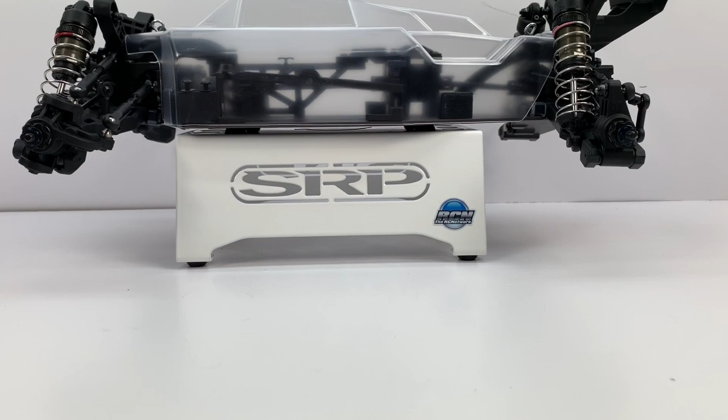This is my full build review of the brand new Tekno EB410.2, Tekno's newest 1/10 scale 4-wheel drive electric competition buggy. In this build review, we'll be going over lots of different topics, including tools needed to assemble your EB, parts left over from the kit, how the owner's manual really is, the actual differences between the 410 and the 410.2. I have mine on hand to compare it side by side, my overall thoughts of this kit, and what the kit's really missing. Also, 2 future videos that will be going over the full reveal, meaning everything fully ready to run on this EB410.2, and finally a running video at OCRC, my local track. As with all of my build reviews, this is everything you get inside the box, fully assembled and ready for electronics, paint, and wheels and tires.

So let's just jump into this.

Some of the tools required to assemble your EB410.2 are a good set of hex wrenches, including a 1.5, 2.0, and 2.5 millimeter hex wrench, a 5.5 and 7.0 nut driver, a good set of needle nose pliers, a good sharp hobby knife, and some Lexan scissors just to trim some parts and cut out the body.

Supplemental tools that definitely help the build are a 3.5 millimeter arm reamer, a body reamer, 2 open-ended turnbuckle wrenches from Tekno, a 5.5, 7, and 4 millimeter is what I use. And finally, Tekno's shock shaft pliers are a great asset to get those shocks built up perfect.

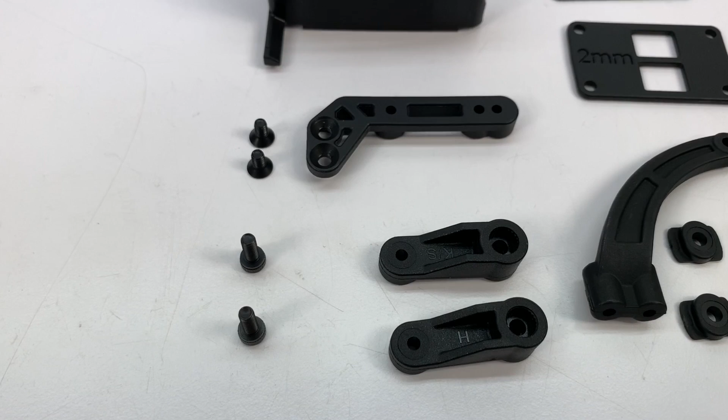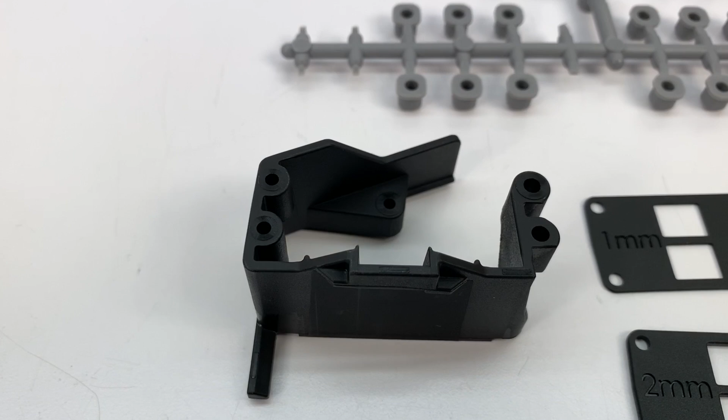Parts left over from the kit are some motor bolts that I'll mount my motor up with. You have 2 different spline servo horns, both 23 and 24 - I mounted up a 25. You have the included motor fan mount and the hardware to mount it. You have a regular sized servo mount, but I installed the low profile servo mount.

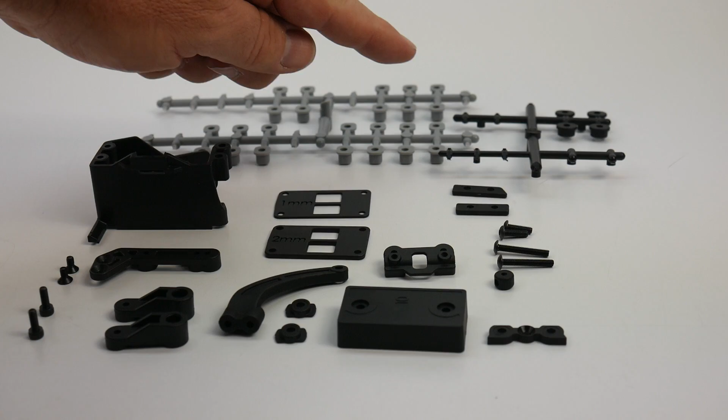All of the pills up here are for the new 3.5 millimeter suspension pins for the car. You have some roll center inserts here for the rear hubs. You have 2 different diff shims, 1 millimeter and 2 millimeter. You have the second rear chassis brace - the stock setting is to mount only the longer one. You also have the inserts to adjust for the diff shims over here.

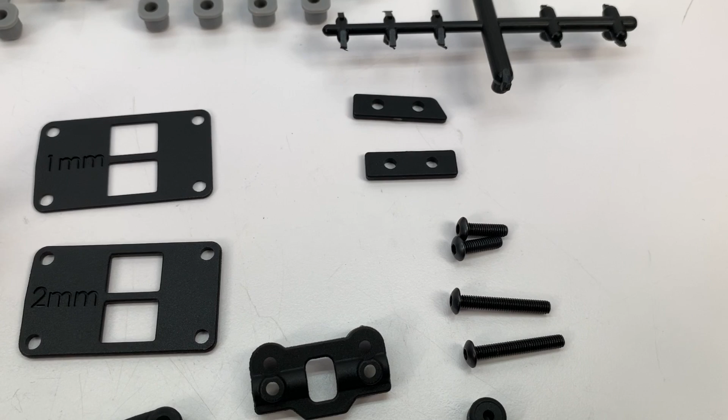You have a 10 millimeter block for the rear wing. You have the rear sway bar mount if you choose to mount it in the traditional setting - more on that a little bit later. Some servo shims right there, some extra hardware, an extra piece for a sway bar, and this thing that I have no clue what it is. It looks like an owl face. Didn't see that anywhere in the owner's manual.

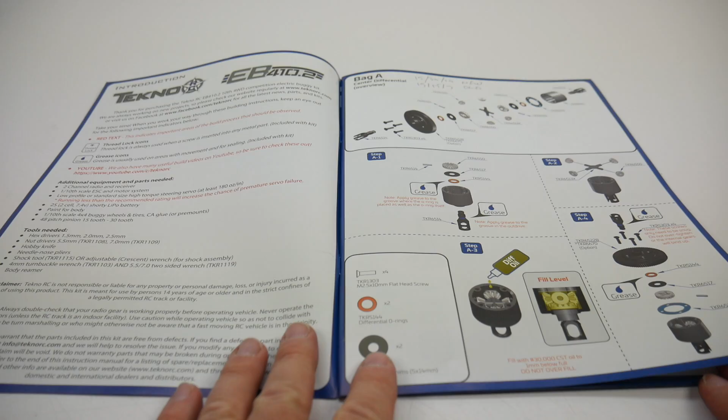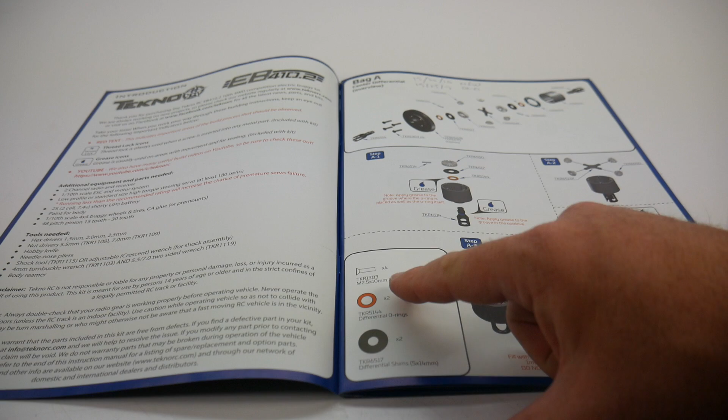Taking a look at the owner's manual for the EB410.2, it's just like all of the other Tekno owner's manuals - it's good, probably the best owner's manual that I've seen in any RC vehicle. They do a lot of great things, not only with the illustrations, but a lot of written content went into this owner's manual, giving you tips and tricks and almost explaining why they're doing things, which is pretty nice. One thing to note, they do give 1-to-1 diagrams here, unlike a certain vehicle I just previously built. They also give you lots of different notes in here on things.

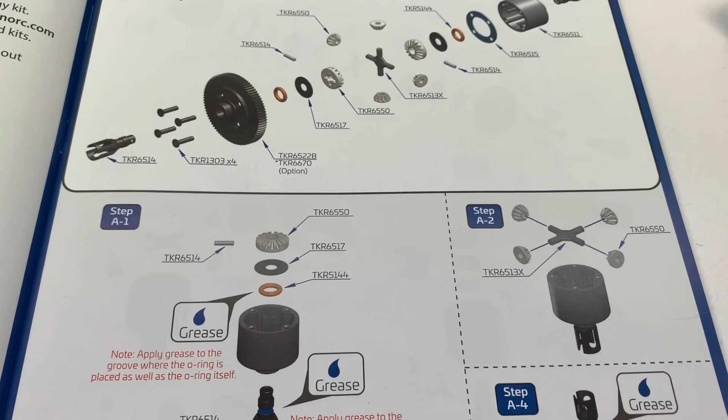Definitely pay attention to these. I sometimes highlight them as I go through, just to point out some things that I thought were pretty cool or things that I had questions about down the line to point out to you guys.

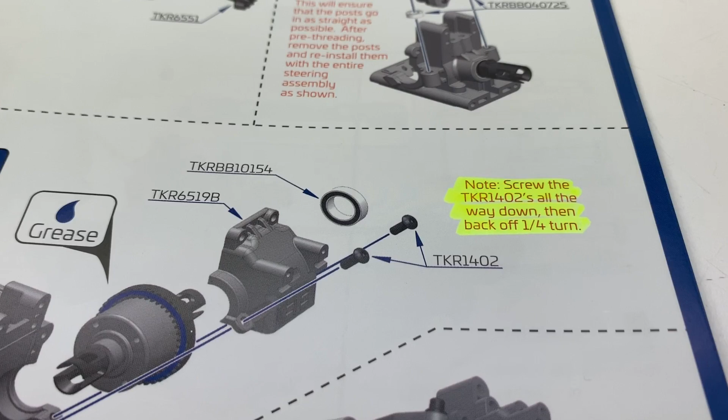The first thing to point out when you're building your EB410.2 is on these screws that actually affix to the diff case. So from the top of the diff case going out to the main portion of the diff case, they say to go ahead and tighten them all the way down and then back them off a quarter turn.

I know a lot of people, when they were building their EB410s, complained of clicking or diffs that were just too tight. This is the reason. Just backing that off a quarter turn, everything is smooth.

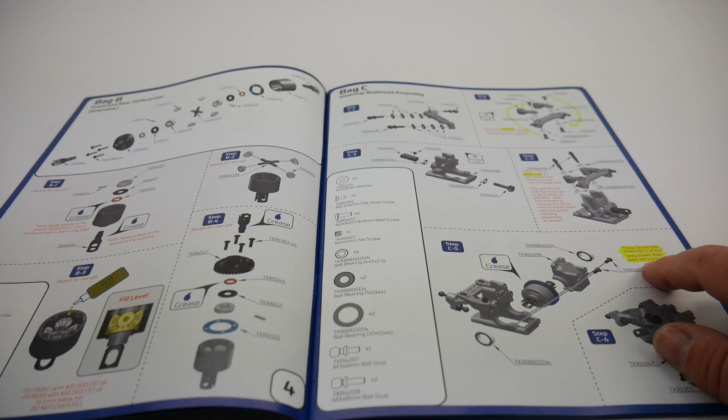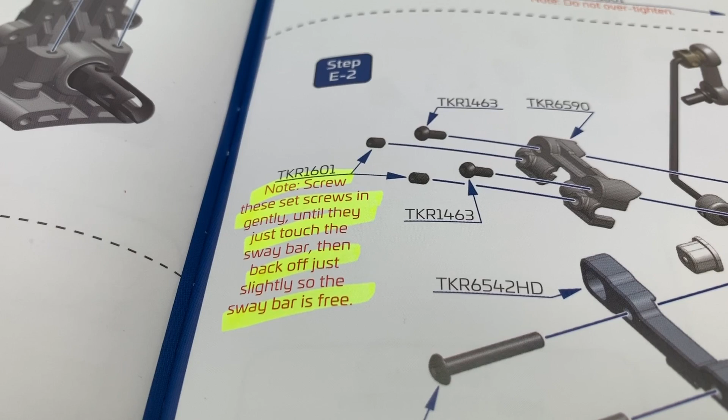Another thing I highlighted here was the specific instructions on setting up your sway bars. They give a note here to screw these screws in gently until they just touch the sway bar, then back off just slightly to let the sway bar free. I think this is a great tip. I didn't see it in the previous gen of the EB, and it's nice that they added it. A lot of people just getting into the hobby don't quite know these tips, and it's nice that they include that in the owner's manual.

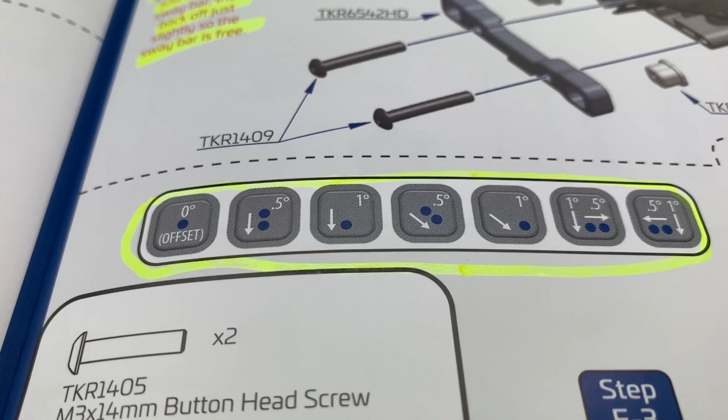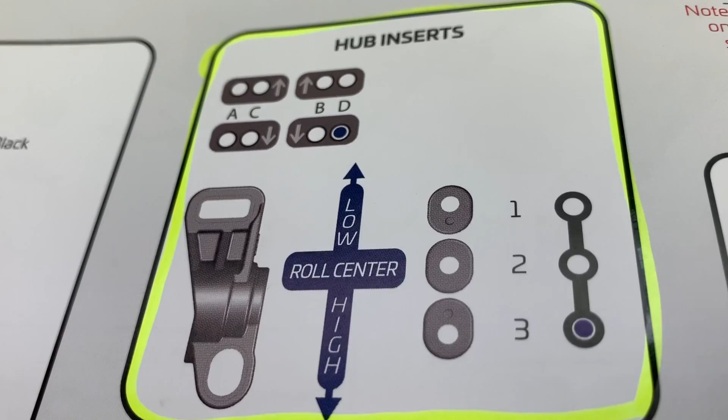Another thing I saw in this owner's manual versus the previous gen was some explanation of the inserts. They're giving lots of different degrees and explanations of what the different dots do on the pill inserts. Also, on the flip side for the roll center, they give you a diagram explaining what each one does. Flipping over to page 12 here, we notice a written note for the king pins.

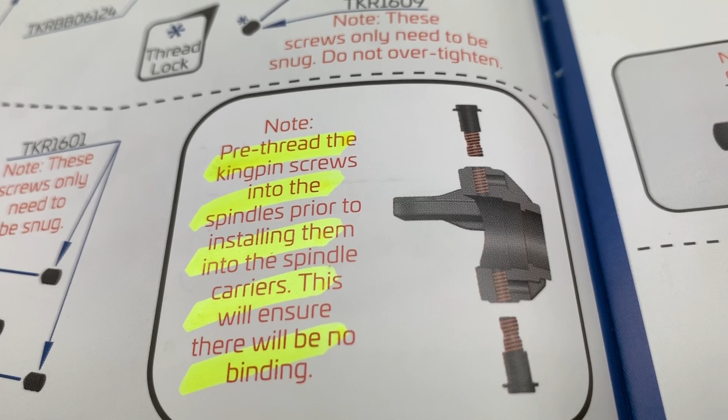Now the king pins go in at slightly weird angles, so they actually suggest to pre-thread them in. In other words, just thread them in without having everything connected. That way when you go to actually attach everything, you line up the threads perfectly and you don't have a problem with getting them cockeyed in. So a good tip there.

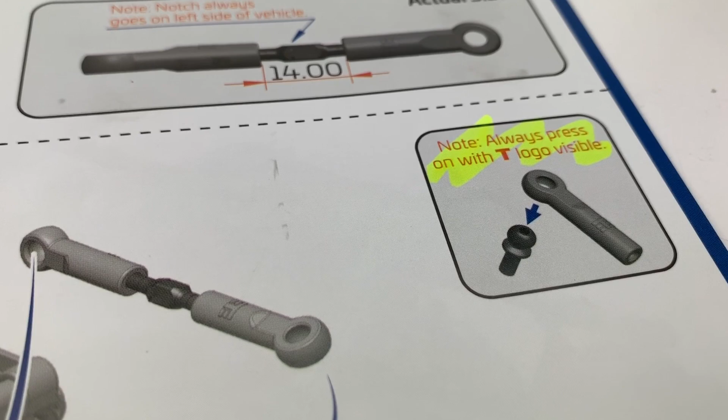Another thing that I pointed out in the previous gen was they do a great job of these turnbuckle ends. They give you like a T on one side that's actually the Tekno logo, and that's the part that goes on the upper part of the ball end. So pushing these in is a no-brainer. You just have to line up where the T's are. It's all set to go.

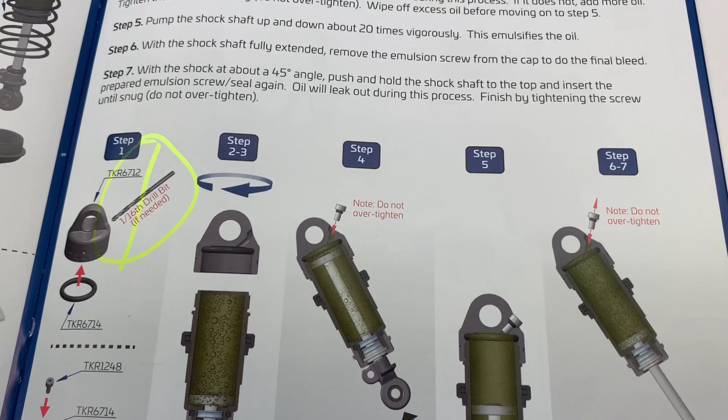One thing that really amazes me is in Tekno's owner's manual, they give not only written instructions to fill the shocks, but also a diagram to show you how to do what they listed. It's pretty cool. I found other vehicles and other manufacturers that just don't give any written explanation. They try to live by the diagrams to explain it, and it just doesn't do a good job. So kudos to Tekno for actually including that.

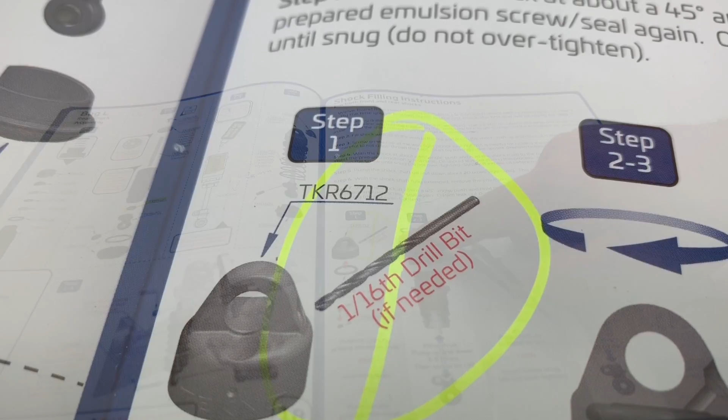Another thing is the 1/16th drill bit is not needed for these shock caps. They're already pre-drilled. I didn't find that I needed to drill those out.

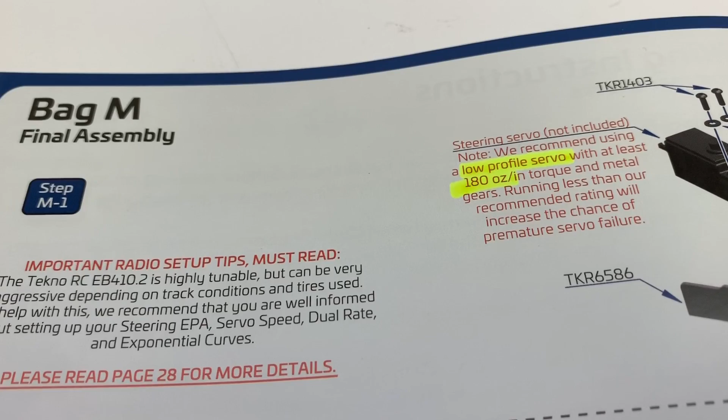One thing I noticed in this EB was they actually started with a low profile mount initially. I think in the previous gen they had the low profile mount like in bag O, it was like the optional bag, and they didn't have clear directions on if you chose to mount it here, throughout the owner's manual, on how to mount it. There's also an issue with the actual linkage to mount everything up, so this actually clarifies everything now, and they're still including both mounts, which is a good thing.

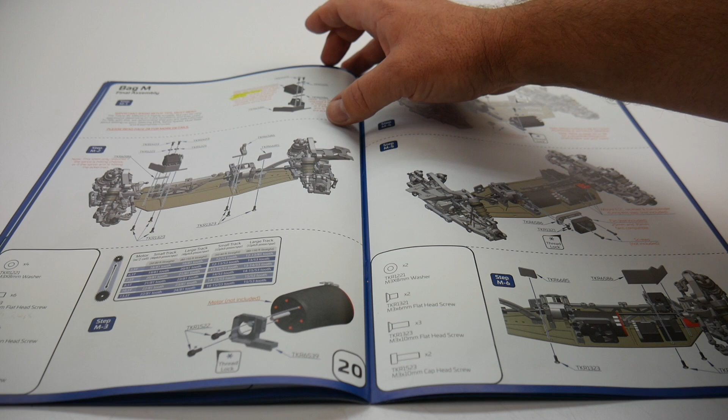They also upped the torque specs. I think in the previous version it said 150 ounce. This one actually recommends 180 ounce or more for a low profile servo.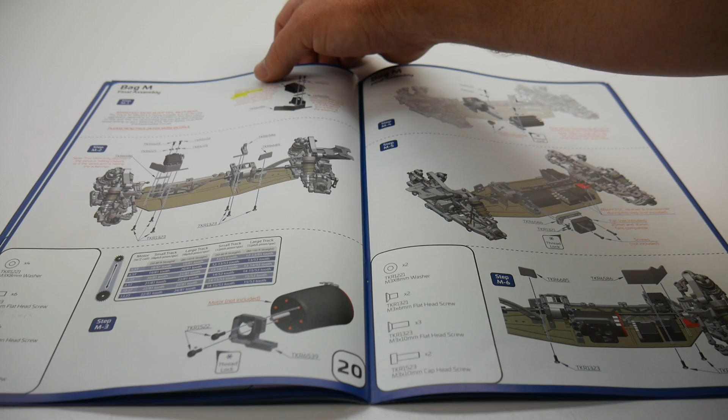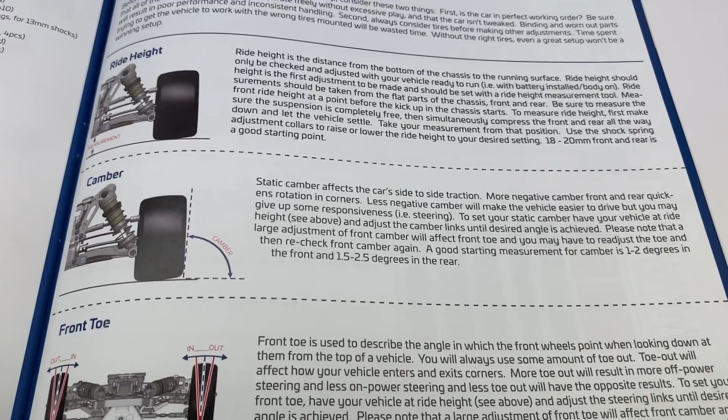Last but not least, in the owner's manual, Tekno does a great job of listing all of the different parts right here on one side, and then setup information to let you know what ride height is, what camber, front toe, Ackerman effect, droop. And then on the flip side, they give you more setup information for springs, pistons, sway bars, wheelbase adjustments, everything you need to know for your new vehicle.

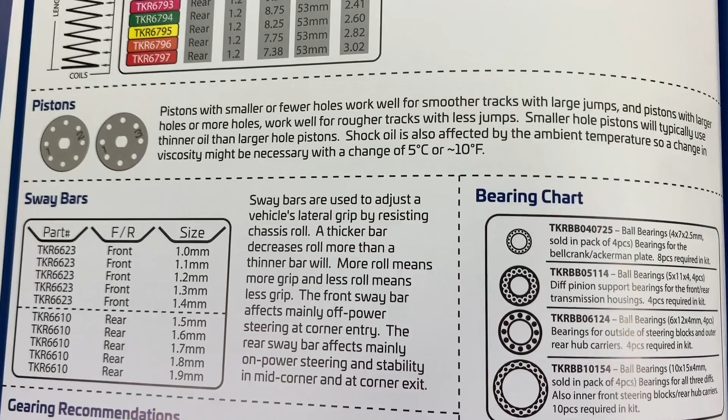So overall on the manual, Tekno did a great job here. I didn't have any errors in the manual and no missing parts, which is a good thing.

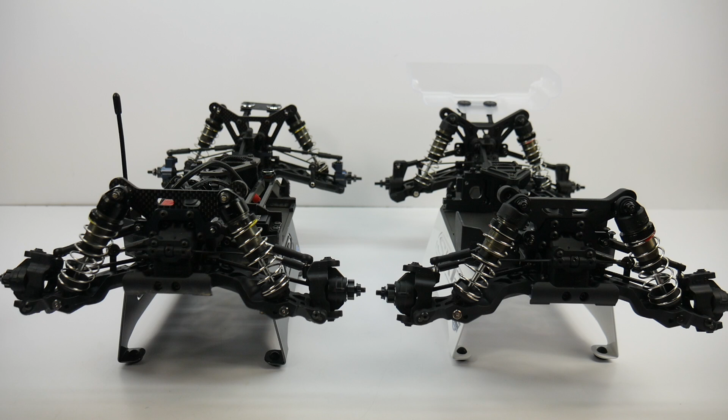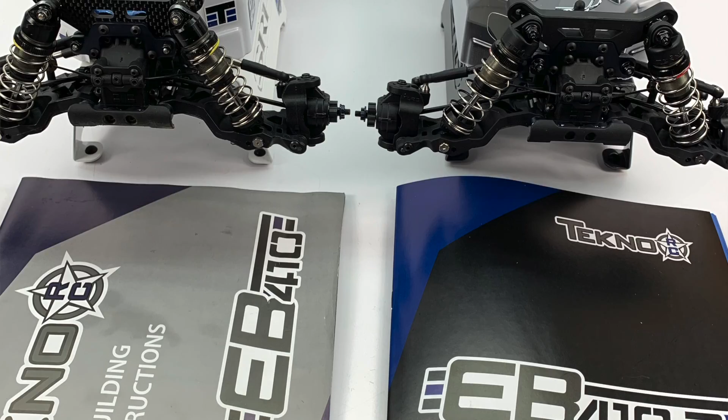During this section of the video, we're going to be comparing all the differences between the 410 versus the 410.2. Now keep in mind, my 410 is fully outfitted with a lot of upgrades and electronics, so keep that in mind when you're viewing this section.

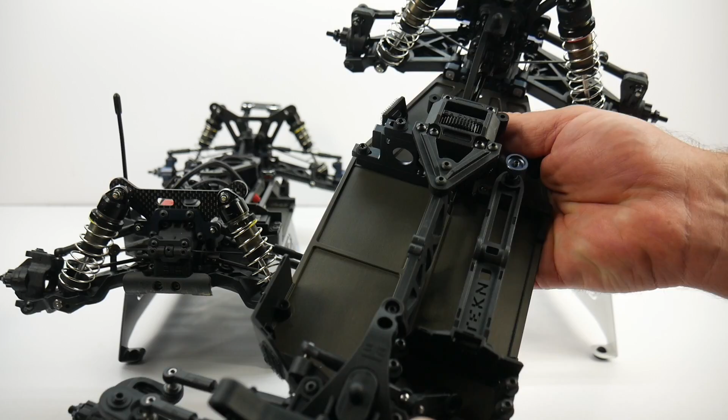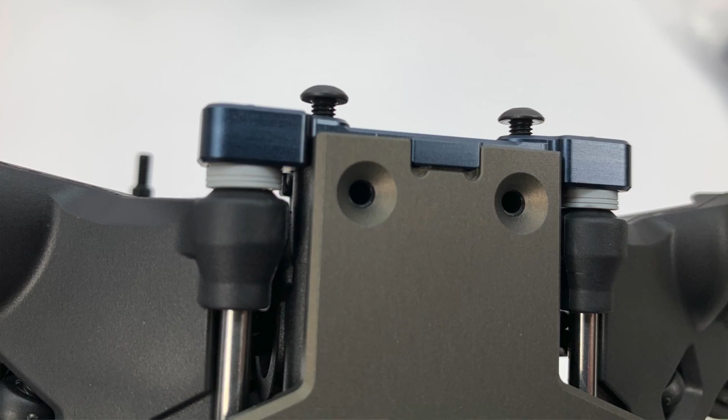First off, Tekno revised the chassis. Now this is using 7075 CNC'd aluminum, a little bit harder aluminum, so it gives a little bit longer wear characteristics. One thing also noted is they used the keyed section right here for the A block going into the chassis, so you do have to loosen those two screws holding the A block on to key it in. It kind of locks it in place. The original 410 did not have that, but the ET410 did.

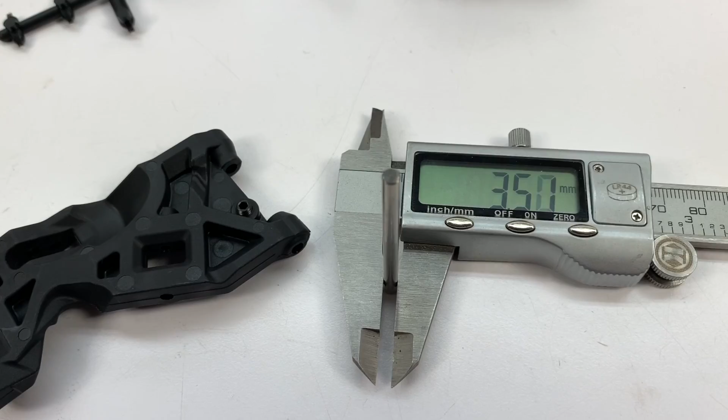Probably one of the biggest updates Tekno made was using larger 3.5 millimeter HD hinge pins and revised hinge pin inserts. All those little pills that go into the A, B, C, and D blocks have all been revised to use 3.5 millimeter HD hinge pins, which is pretty cool. It's hard to see the difference up close here on the actual 410.2, but they're definitely there.

I just compared the caliper size of the hinge pins, and they're definitely different. I did see a model change on the A, B, C, and D block. They're all denoted by an HD at the end of the model number. I didn't see a physical difference in the A, B, C, and D block, but they definitely have different model numbers.

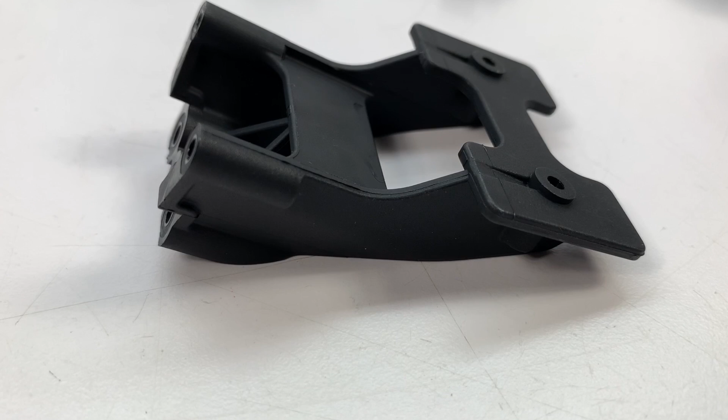Flipping the buggies around, next we're going to talk about the taller, stronger one-piece wing mount and height adjustments. On the new 410.2, it's a one-piece design. The previous version had two different sides and didn't really have a centerpiece that brought it all together, so this is definitely a stronger piece. It's all molded plastic, one piece, nothing had to be put together.

They're also including these riser blocks now. This is the 5mm version, I believe, and there's also a 10mm version included in the kit. Now taking a look at the 410 version, you can definitely see how thin these things are. Maybe it was a weight savings thing originally, but they're definitely flexy, especially when you start landing upside down like a lot of us do.

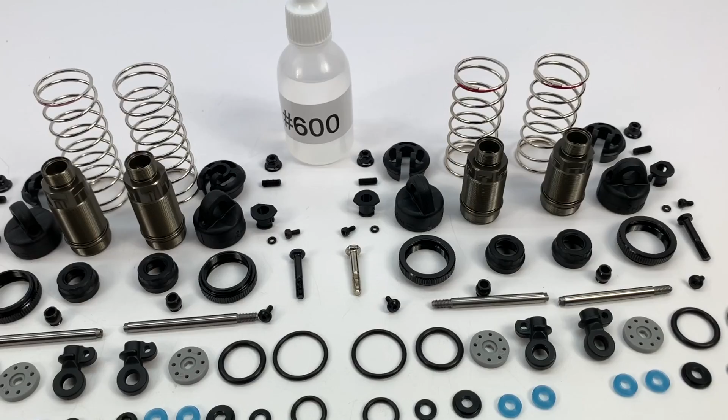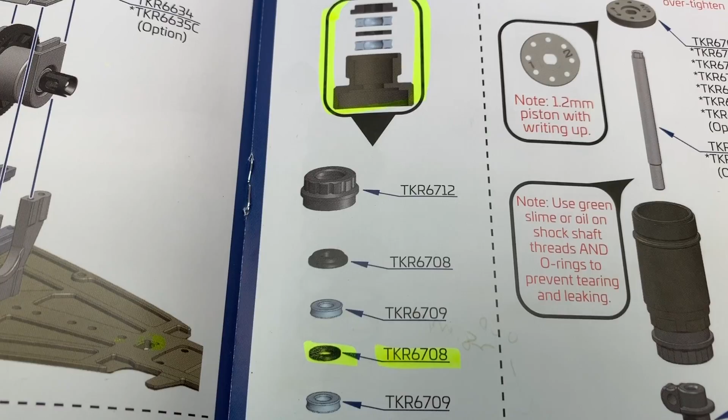Next up was the shock revision. They actually changed the cartridge inside the bottom of the shock. A lot of upgrades in the past involved adding a plastic spacer between the two X-rings — I think MIP had a kit out for it — and they're actually including that now inside the cartridge. So you have X-ring, plastic spacer, X-ring, plastic spacer, and cap. It's all built in now, and I think we should have some pretty good experiences with these new shock cartridges.

Also on the shocks, Tekno mentions the ultra secure locking spring perch design. I didn't see a difference — they look identical to the 410 and also the ET410. I don't see any kind of change here; it's just a grub screw that goes through the bottom eyelet up to the spring perch. No difference there that I can see. Maybe someone can answer that down in the comment section.

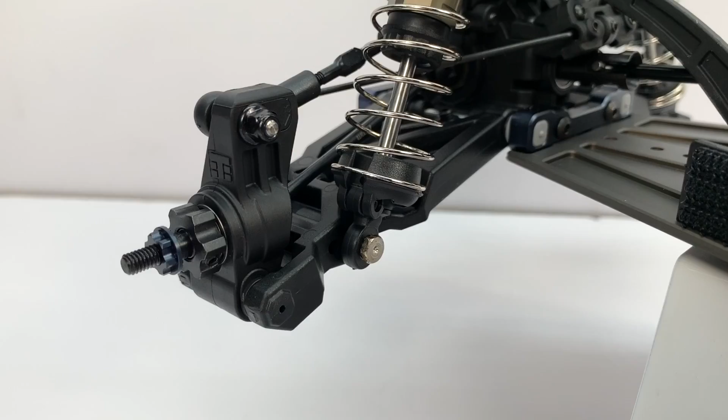Another big change was on the rear end of this vehicle. Right here you're seeing on the 410.2, shocks are mounted in the front, whereas on the old version, shocks were mounted in the back. A lot of people were flipping the arms and adding the shocks up here — well, Tekno did it at the factory. They gave us a reverse sway bar and adjusted everything to make this perfectly fitting.

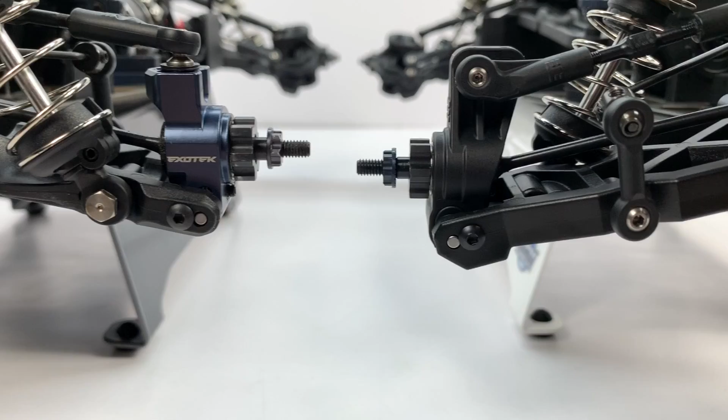And with that came newly designed rear arms. They're not only capable of mounting the shocks in the front now, but they're also thicker and more durable overall.

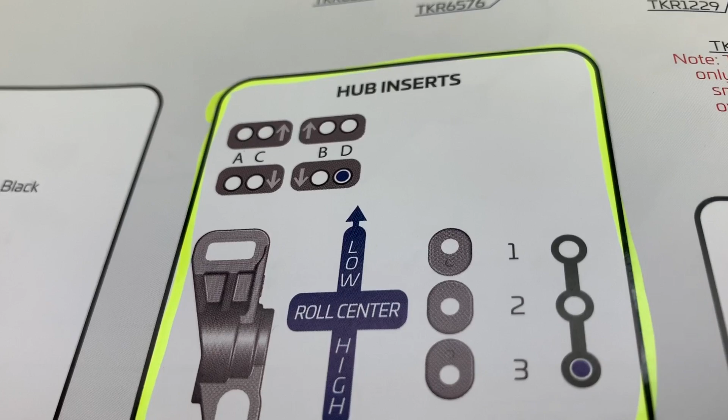Also added in the 410.2 is adjustable roll center on the rear hubs. It's controlled by two inserts that go on either side of the rear hub, allowing you to place the hub either lower or higher on the actual suspension arm, giving you even more tunability of your 410.2.

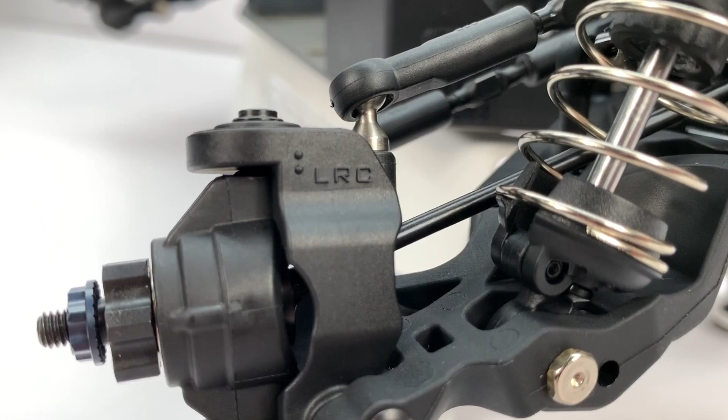Looking at the front spindle carriers on the 410.2, these are new 15-degree LRC spindle carriers. They're actually notated on the plastic mold with the letters LRC, just giving you another option. The front camber plate on the 410.2 is a little bit beefier.

It's kind of keyed into the front shock tower, so it gives you a little bit more durability, and it also acts as a bulkhead brace. Now I don't have a good example here on my 410 because I have the carbon shock tower, so you can see how much smaller this one is versus the thickness right here of the new 410.2.

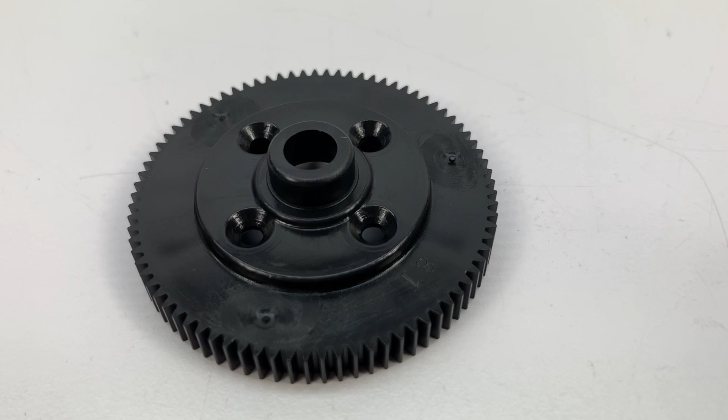Although I've never stripped a spur gear on any of my 410 vehicles, Tekno decided to go ahead and change the material of the center differential spur gear. So they're giving us still an 81 tooth, but it used a revised material just to give it a little bit more durability.

Although I have my 410 outfitted with a front sway bar, the original 410 did not come with a front sway bar, but now the 410.2 comes with both front and rear sway bars included in the box.

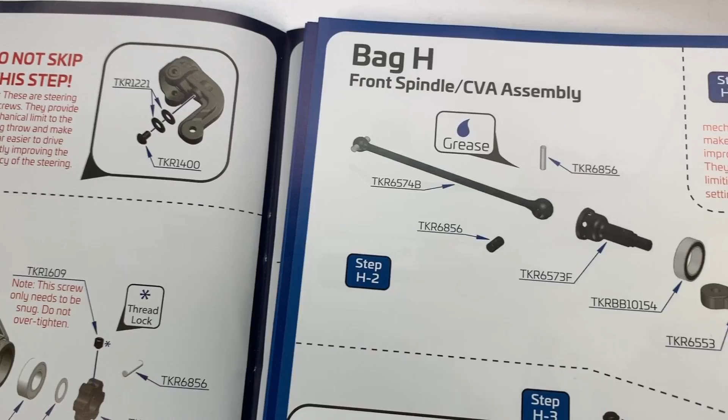Another update that kind of baffled me was it states it has large wheel bearings and 6mm HD stub axles. Now from the 410 to the 410.2, just comparing the owner's manual, I didn't see any difference in either bearing size or a model number change in the stub axles. They all appear to be the same. Maybe that's another question that can be answered down in the comment section.

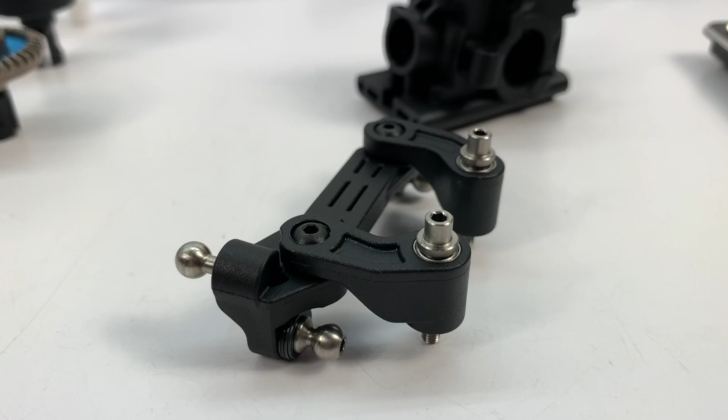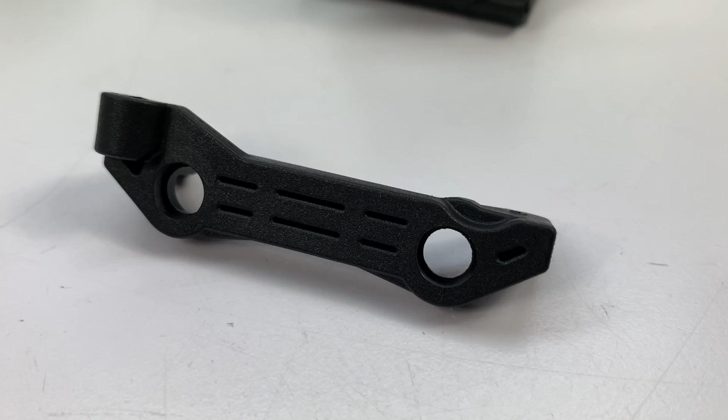The final change listed by Tekno was a newly optimized reverse Bellcrank steering system. We always knew this was a reverse Bellcrank system, but they definitely tightened up the gussets right here. They're definitely smaller on this version versus the 410, and they've tightened some of the tolerances, including this linkage which uses a 30mm grub screw versus an 18 in the previous.

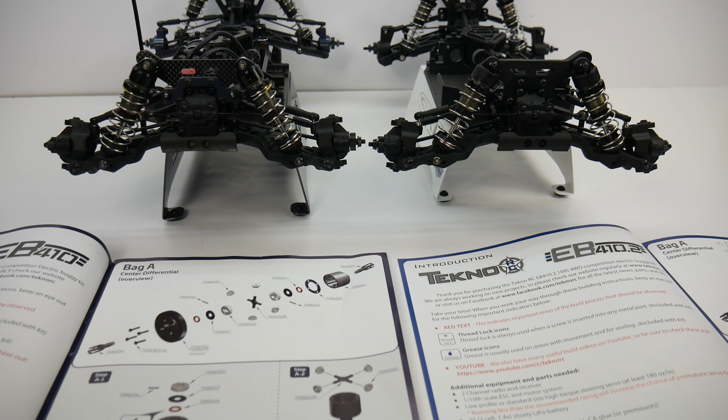Now that we've gotten all the official upgrades and revisions done that Tekno mentioned, let's go over some of the other ones that I saw that weren't mentioned.

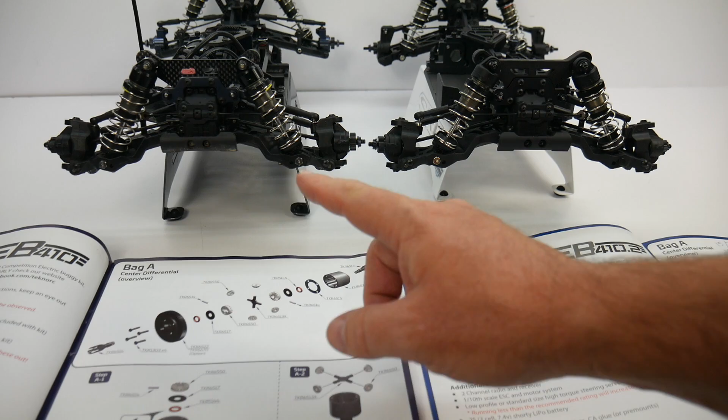Let's start off with the wheelbase change. I noticed just from my stock setup over here on the 410 versus the 410.2 stock, that the 410.2 is about 5 to 6 millimeters shorter wheelbase overall. I've made no changes to the wheelbase here on my stock 410, and the 410.2 is just a little bit shorter.

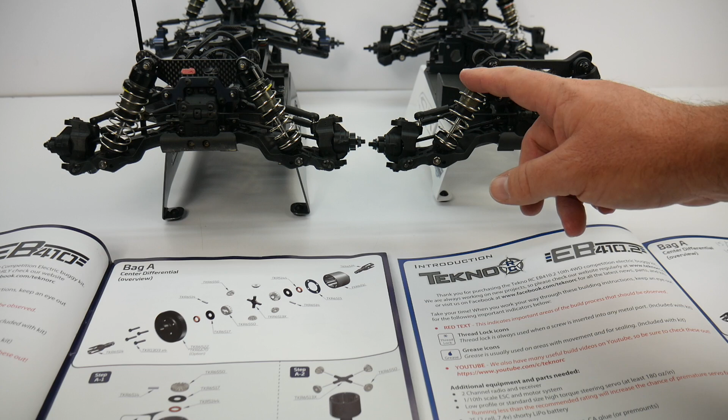Next up on the differentials, the 410 used a 15-15-7 spread for their differentials, where the 410.2 uses a 15-30-10. So quite a bit of difference, although no changes in the actual differentials.

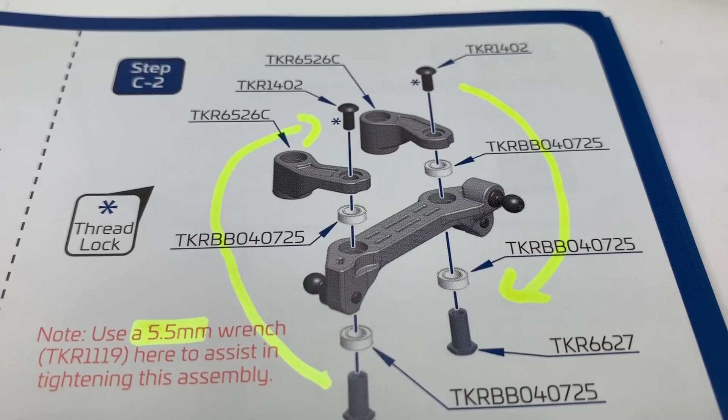Talking more about that reverse Bellcrank system, they actually flip-flopped the way they have everything mounted. On the 410, they had the aluminum nut on the top side and the screw on the bottom. They flipped that on the 410.2, so the aluminum nut was actually captured on top of one of the Bellcranks here, where this one is kind of free floating.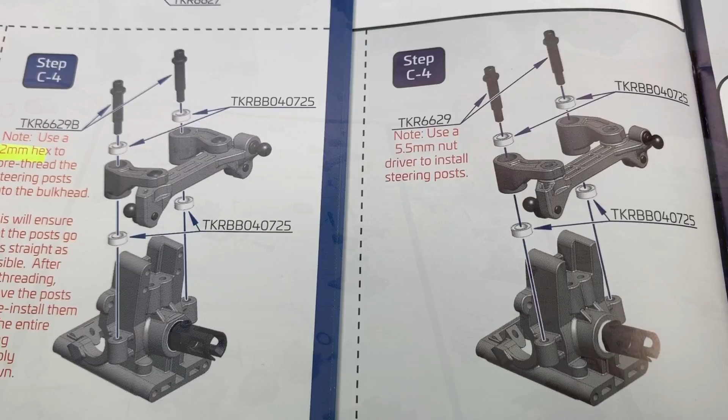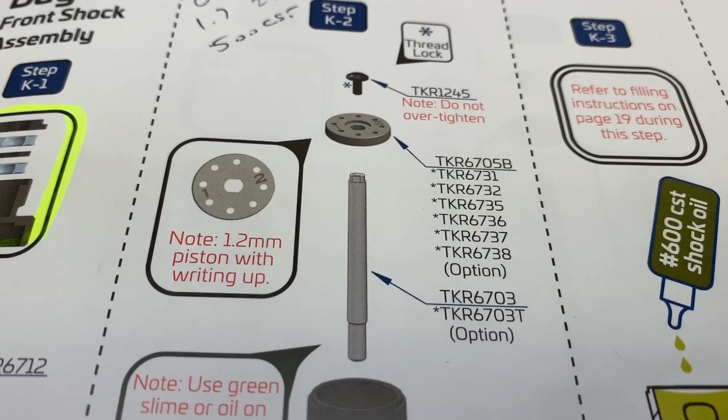Now for the shock package, of course we mentioned the included spacer now in between the two X rings, but another change on the shock package were the pistons. On the fronts, 1.2 millimeter 8-hole pistons are stock now on the 410.2, where the stock on the 410 was asymmetrical, with two 1.7 millimeter holes and 4 smaller holes that were not denoted. They also used 600 weight on the new version versus 500 weight on the old 410.

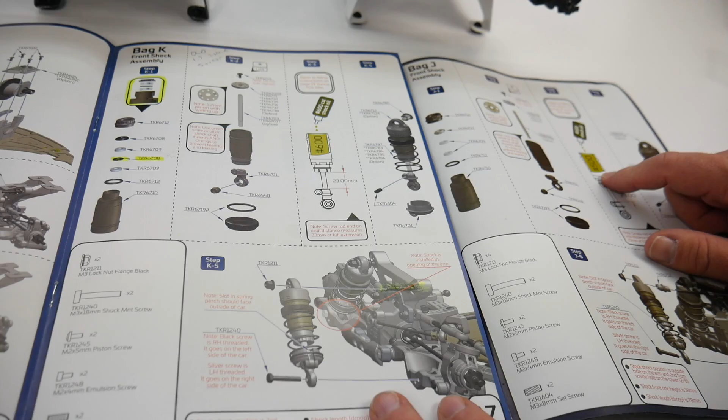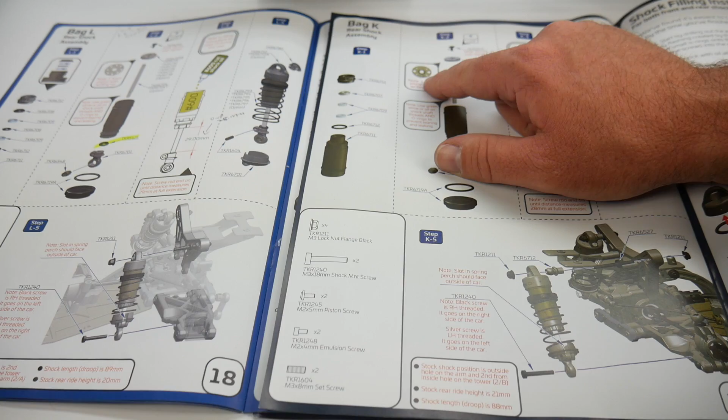Same with the rears, 1.3 millimeter 8-hole pistons on the 410.2, and they use 1.8 asymmetrical once again on the rears on the 410. Oil stayed the same with 600 in the 410.2 and 500 on the 410.

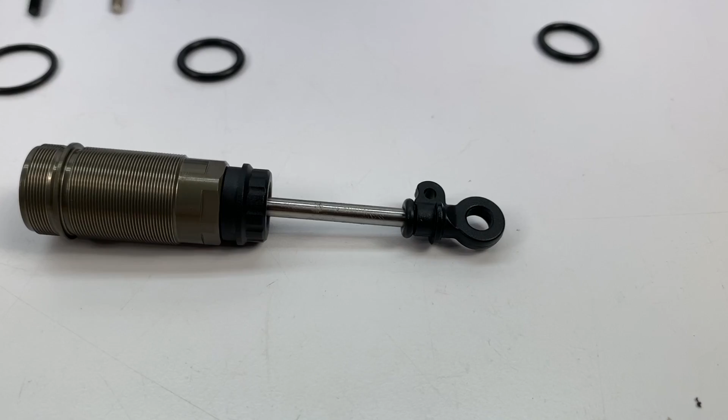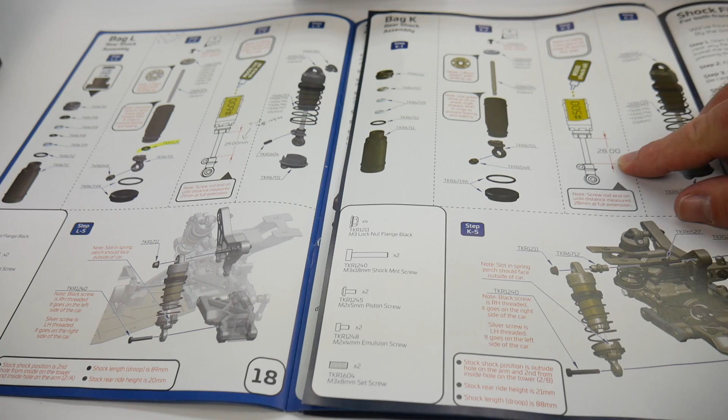One last thing to note on the rear shock package only, they included this spacer, or rubber O-ring. This rides on top of the bottom eyelet on the shock shaft, so it's going to limit the amount of travel you have. I looked at the spacing here, 29 millimeters on the 410.2 versus 28 millimeters on the 410, so a little bit different as far as travel. Just make a note of that when you're opening the bags, because you'll have 2 extra O-rings on the rears. As far as the actual build, this went together very nicely.

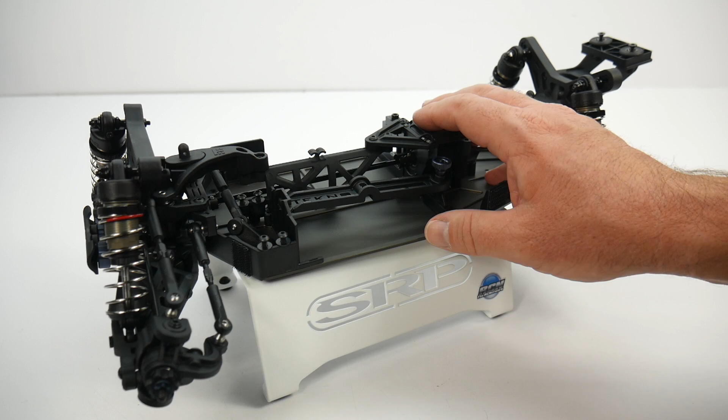Now, I'm pretty accustomed to putting together Tekno kits, so I almost didn't need a manual except for the parts that were slightly different. I've got to say, all the fit and finishes on this vehicle were absolutely awesome. The only thing I still give Tekno a lot of crap for are these shock caps. They've definitely improved since the first gen of the 410, but they're still plastic and still a little bit of a pain to thread on. You kind of have to back off the threads to find where it engages. I had 2 that went on perfectly fine, and the other 2 gave me a little bit of a headache.

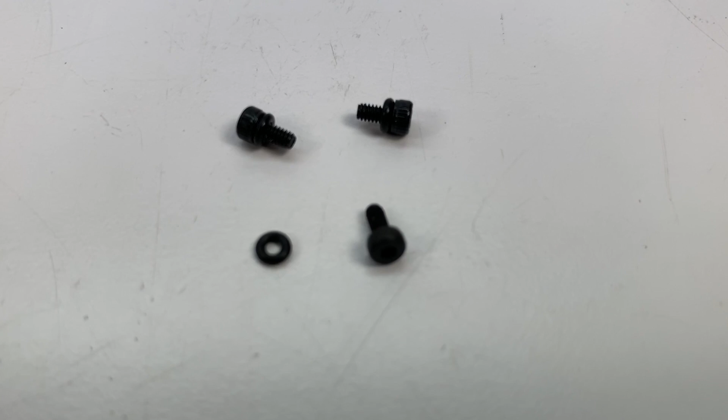Now, on the flip side, the actual bleeder screw has been improved. I'm not sure if they improved the screw or the O-ring that goes on it, but you know exactly which O-ring that thing is - what a pain in the ass it was to get those O-rings on. The new ones have been improved. I'm not sure if they gave a little more elasticity to the O-ring, or made the screw have a little more bite to it, but they went on so much easier on the new 410.2.

So the 2 things I think the 410.2 should have come with: of course aluminum shock caps, or a drastic improvement to the plastic ones. Although I had like a 50% success rate on getting them on the first shot, it was still a bit of a pain in the butt, and I think some newbies out there are definitely going to cross-thread them. I know I cross-threaded one of my original ones way back when.

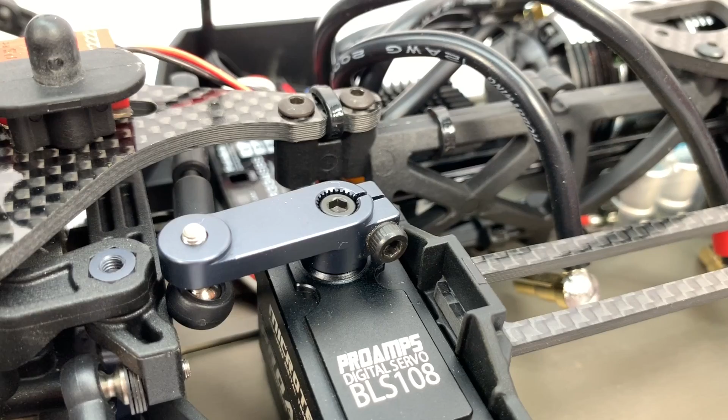Now, the other thing that I think every EB should come with is an aluminum servo horn. I know it's hard to pick what servo horn a customer is going to need, but I think 25 tooth spline is probably 85% of the industry now. There's only a couple holding on to 23s and very few on 24. So I think if Tekno were to throw in a 25 tooth spline aluminum servo horn, it would make a lot of customers happy. So those are the only 2 things I think this kit needs right out of the box - aluminum shock caps and that aluminum servo horn.

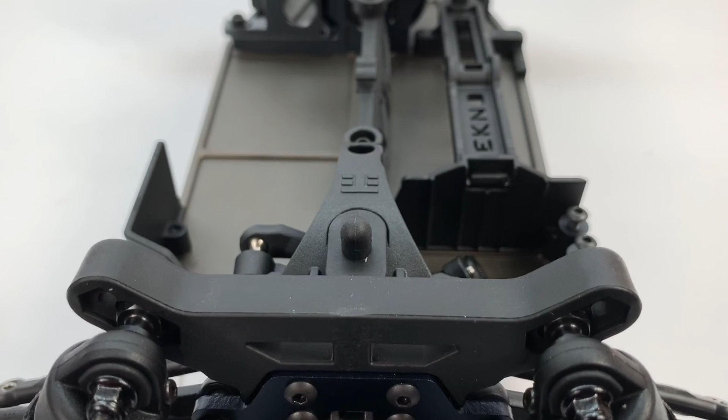Well guys, that is my full build review of the brand new Tekno EB410.2. I can't wait to get this thing outfitted with some great electronics, and that'll all be shown in the next video, the actual reveal video, where you'll see the electronics, the wheels and tires, and of course how I painted the body up. So stay tuned for that video.

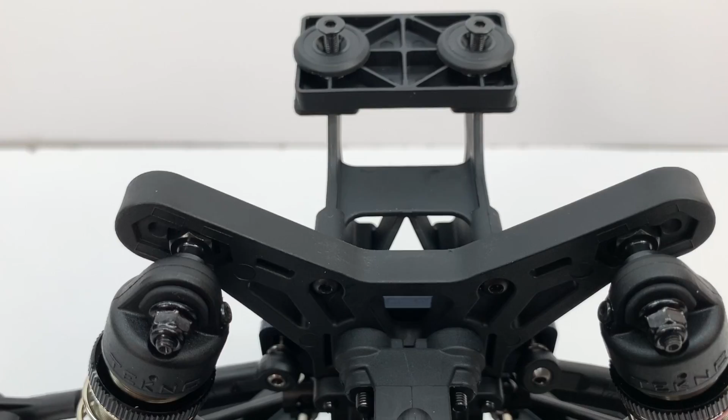And then after that, you will see a full running video of not only this vehicle but also my regular 410. We're going to take it over to OCRC, put some laps down, and compare the two vehicles. I'll have them bound to different remotes. Hopefully I can capture some great footage of not only my EB410, but the brand new EB410.2.